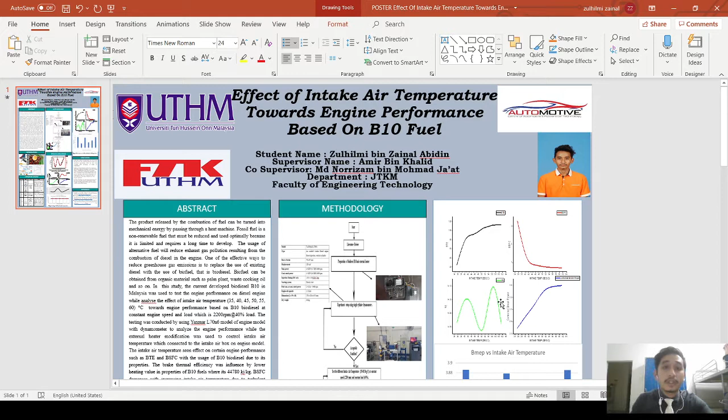In this video, I will present my final year project PSM2, which is the effect of the intake air temperature towards the engine performance based on B10 fuel. In this study, the current developed diesel, which is B10 fuel, was used to test the engine performance on the diesel engine while analyzing the effect of the intake air temperature from 35 degrees Celsius to 60 degrees Celsius with 5 degrees Celsius increments, towards the engine performance based on B10 fuel at constant engine speed and load, which is 2200 rpm and 40% load.

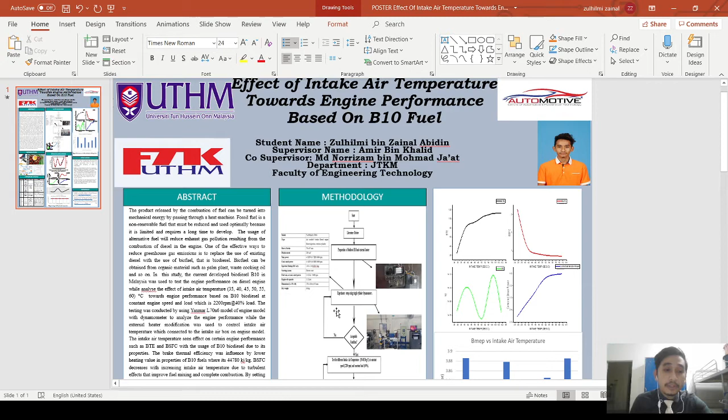The testing was conducted using the Yanmar L70 N6 model engine with a dynamometer to analyze the engine performance, while an external heater that was modified was used to control the intake air temperature, which connected to the intake air box on the engine model.

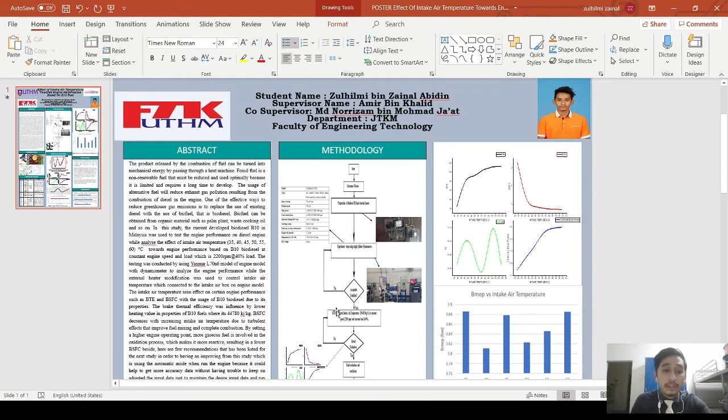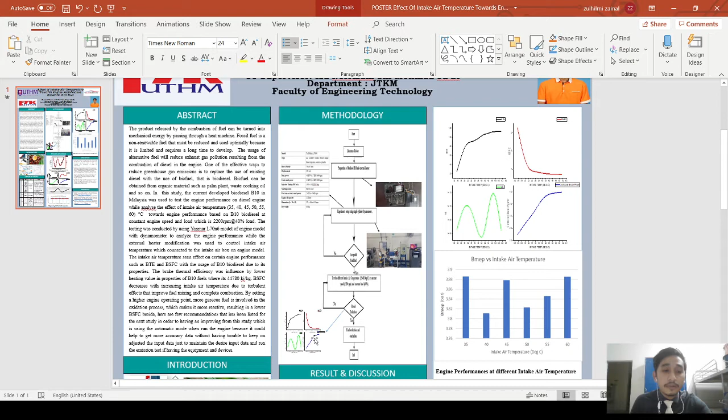The intake air temperature was seen to affect certain engine performance, such as brake thermal efficiency and brake specific fuel consumption. The brake thermal efficiency was influenced by the lower heating value in the properties of B10 fuel, which is 44780 kilojoule per kg, and the brake specific fuel consumption decreased with increasing intake air temperature due to the turbulence effect that improved the fuel mixing and complete combustion.

Next, for the introduction: based on the current situation we are facing with the decreasing petroleum sources and increasing price of petroleum fuel, the currently developed fuel, which is biodiesel, is quite popular among users and researchers due to the green environment, besides having potential to improve engine performance.

The current biodiesel released in Malaysia, which is B10 fuel, where the palm oil is produced and blended with pure diesel, with a 10% palm oil and 90% pure diesel ratio.

Besides, recent studies show that there is a significant difference in intake and exhaust gases depending on the intake air temperature. It's widely known that combustion and emission performance highly depend on the availability of oxygen and the properties of the fuel.

Additional oxygen creates a very lean mixture, causing unstable combustion and misfire. In fact, a lean mixture tends to set a longer ignition delay and lower the combustion rate, resulting in a longer time to burn.

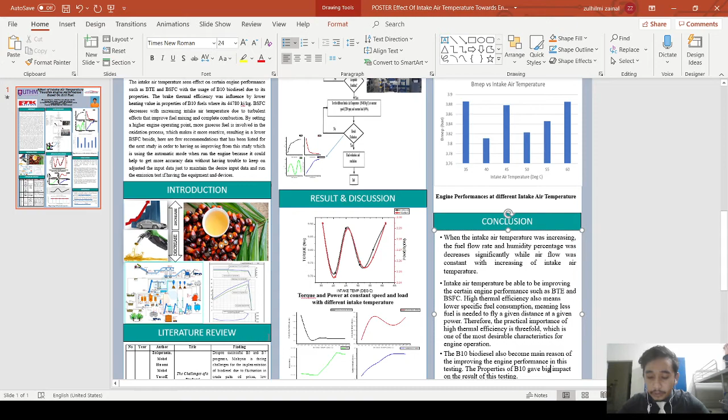Next is the literature review. The table shows the main literature used to conduct this study. The first one is a study from 2020 on the challenge of the biodiesel implementation program in Malaysia.

Despite the successful B5 and B7 programs, Malaysia is facing challenges in implementing biodiesel due to fluctuating palm oil prices, low domestic usage of palm oil, and vehicle warranty issues. Improvement of palm oil quality and promotion of B10 through targeted agencies in the central region of Malaysia will help implement the biodiesel program successfully.

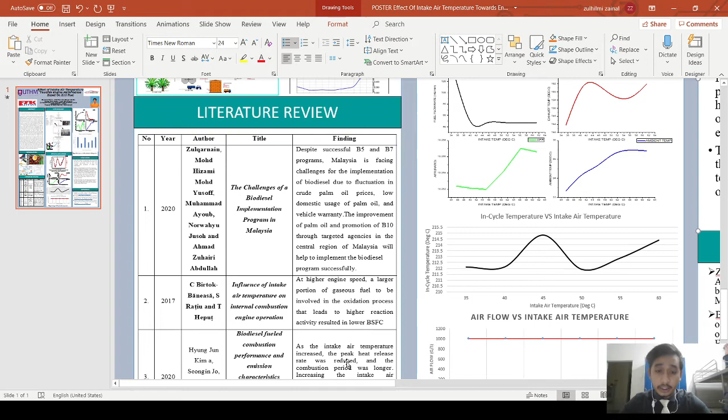Next, from 2017, a study on the influence of intake air temperature on internal combustion engine operation found that at higher engine speed, a large portion of gases are involved in the oxidation process, leading to higher reaction activity and resulting in lower brake specific fuel consumption.

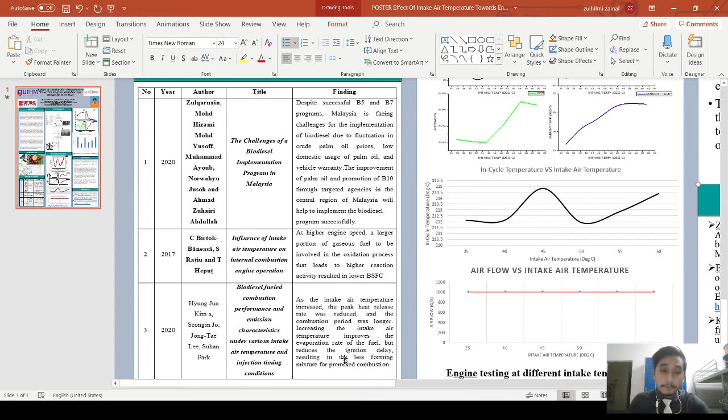The third study, from 2020, is on biodiesel fuel combustion performance and emission characteristics under various intake air temperature and injection timing conditions. The findings showed that as intake air temperature increased, the peak heat release rate was reduced and the combustion period was longer. Increasing the intake air temperature also improved the evaporation rate of the fuel but reduced the ignition delay, resulting in less forming mixture for premix combustion.

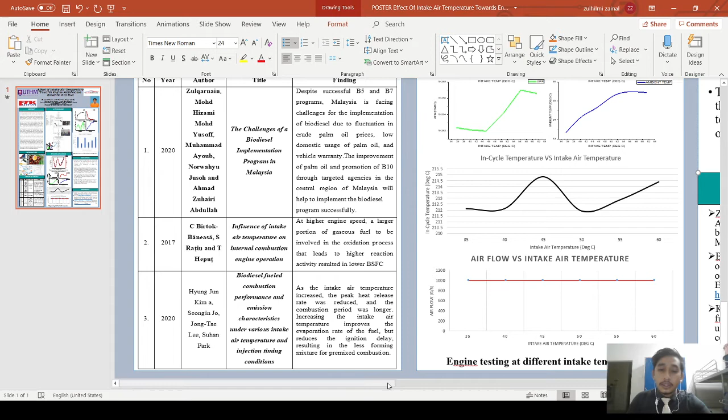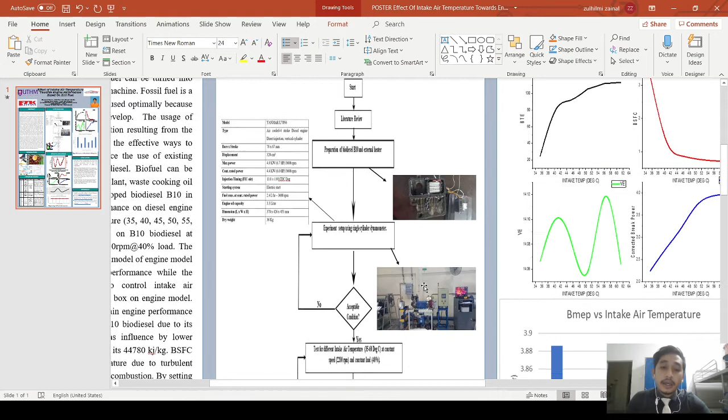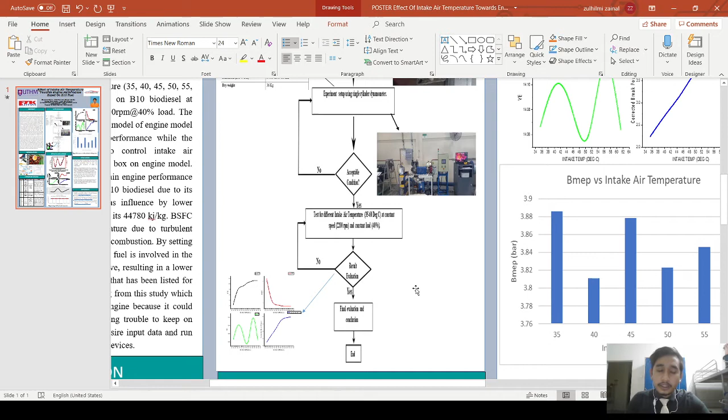After selecting the engine to use, I start the experiment. After the start of the experiment, I collected the data and tested the data to see whether it is valid or not valid, and then I start the analysis and then start writing the report. Until today, I've been presenting my final year project before the final submission. Next, the result and discussion.

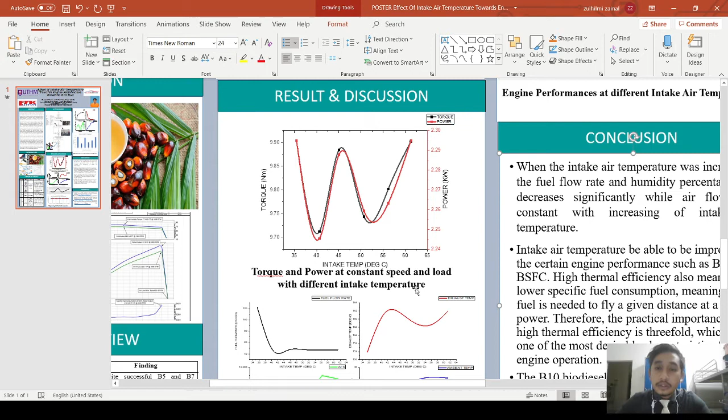Next is the result from the engine testing, which is the fuel flow rate. It shows a decrease starting from the increasing intake air temperature from 35 to 60 degrees Celsius, with only a slight increase at 40 to 45 degrees Celsius. However, it decreases again, but only with a slight movement.

Next is exhaust temperature. It increases, starting from intake air temperature at 35 degrees Celsius to 40 degrees Celsius. However, it drops at 55 degrees Celsius before it starts to rise again to 60 degrees Celsius.

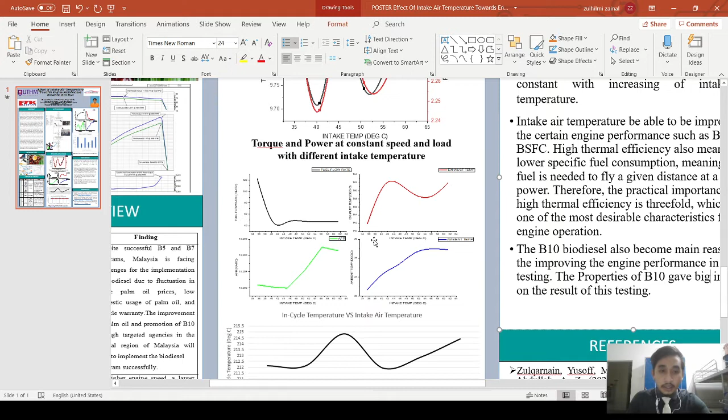Next is air fuel ratio, which has a slight decrease at 35 to 55 degrees Celsius, and proportionally increases at 55 degrees Celsius before it slightly decreases until 60 degrees Celsius.

The ambient temperature shows an increase along with increasing the intake air temperature.

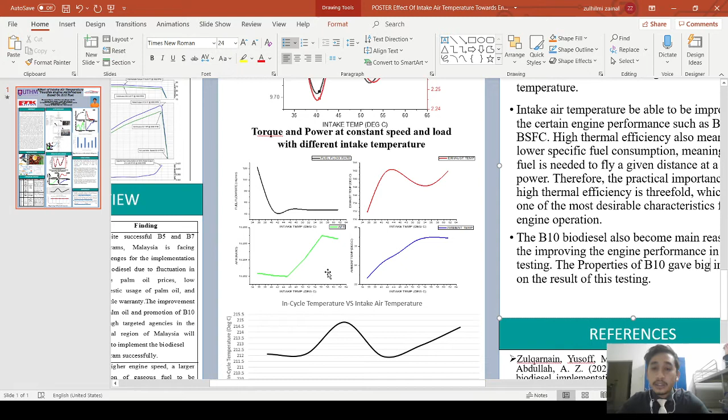Next is the in-cycle temperature during increasing intake air temperature. At 35 to 40 degrees Celsius, the in-cycle temperature slightly decreased, and has increased from 40 to 45 degrees Celsius, then continues to drop to 50 degrees Celsius before it starts to rise to 60 degrees Celsius.

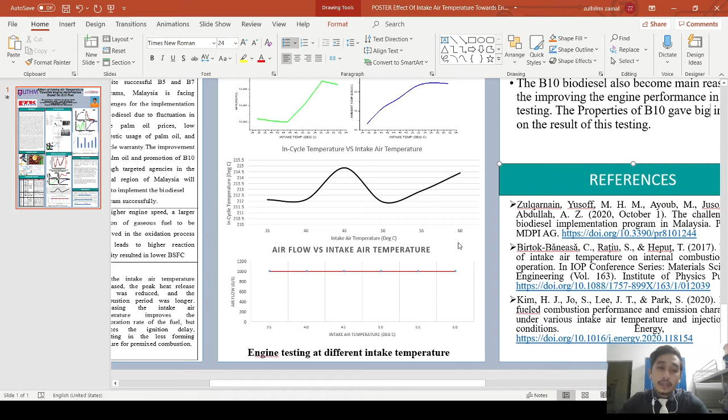And then airflow at the different intake air temperatures has been constant at all the intake air temperatures tested.

Next is the effect of the intake air temperature, which the figure shows in the results of the BTE, BSFC, VE and corrected brake power, by increasing the intake air temperature.

The brake thermal efficiency shows that it was increased alongside increasing the intake air temperature.

Next is the brake specific fuel consumption. It showed that it was decreasing with increasing intake air temperature, while the volumetric efficiency showed that it starts to increase when increasing the intake air temperature from 35 to 40 degrees Celsius. However, it dropped

until 14.06, only slightly, to 50 degrees Celsius, and continues rising until 14.12%, then continues to drop at 60 degrees Celsius at

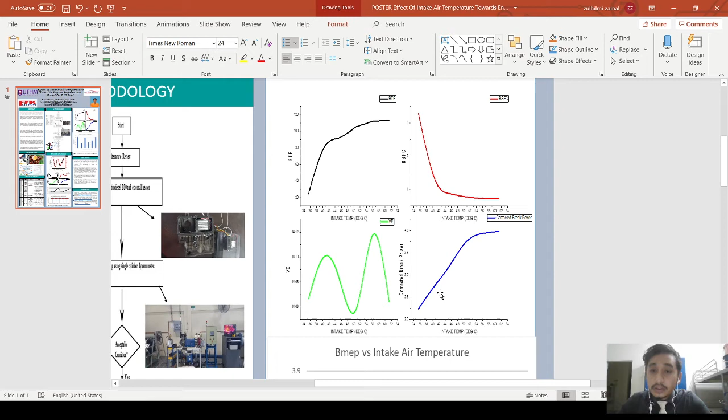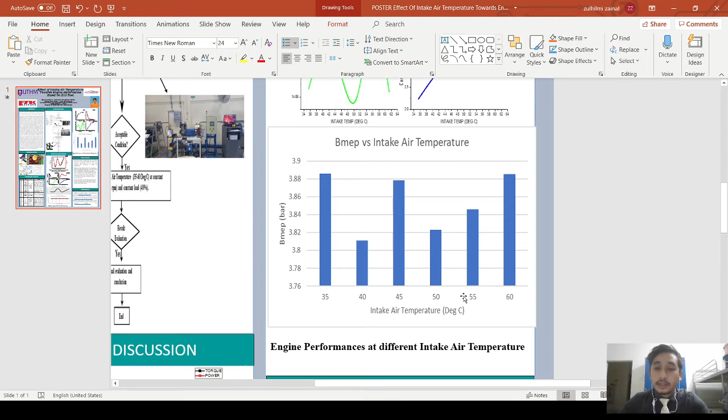Next is BMEP at various intake air temperatures, which shows that from 35 degrees Celsius it dropped to 40 degrees Celsius, from 3.885 to 3.81, and then continues rising at 45 degrees Celsius, then drops back to 50 degrees Celsius, and continues to increase until it reaches 60 degrees Celsius.

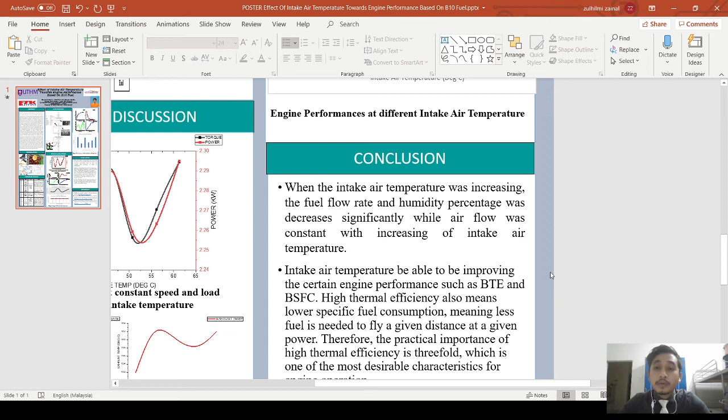So as the conclusion, the intake air temperature actually gives an impact on the engine performance, such as brake thermal efficiency and brake specific fuel consumption. The experiment showed that when the intake air temperature was increasing, the fuel flow rate and humidity percentage were decreasing significantly, while the airflow was constant with increasing intake air temperature.

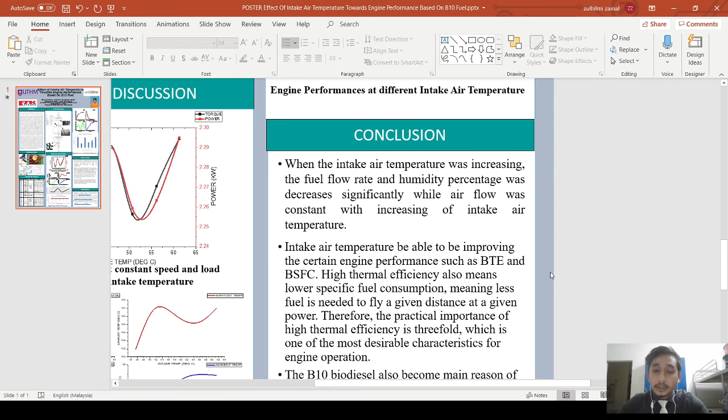Next, the intake air temperature is able to improve certain engine performance such as the BTE and BSFC, while high thermal efficiency also means lower specific fuel consumption, meaning less fuel is needed to fly a given distance at a given power. Therefore, the practical importance of high thermal efficiency is threefold, which is one of the desirable characteristics for engine operation. Lastly, B10 biodiesel fuel also becomes a main reason for the improvement in this testing. The properties of B10 also give a big impact on the result of this testing.